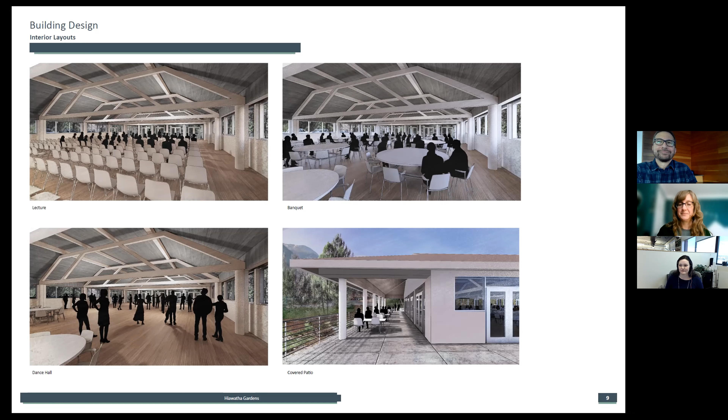To build off of that, in terms of the site, some of the big picture goals are to provide opportunities for parking, and from there those exiting their vehicles have access to the bus stop and shelter on the west side of the site. If you aren't arriving by vehicle, you may be coming via the bus, or we're also providing options for bikes and bike lockers. In terms of that multimodal community and parking lot, we're also looking at electric vehicle charging stations and planning for the future uses of this site.

Each of these alternatives takes that into mind, really looking at and capitalizing on the pedestrian and bicycle connections, as well as vehicular circulation throughout. A concurrent project which ties into our site is the potential future creek trail connection, which will provide access to pedestrians and bicyclists to this Hiawatha Gardens site.

On this first alternative, you see that a pedestrian may enter the site from the plaza area. If they're coming from the creek and have access to the building, they could exit via the bus stop shelter using an accessible ramp or stairs to also access this large plaza area. And if arriving by vehicle, the main vehicular entry is located on the north side of the site, adjacent to and across from Pinon Lane.

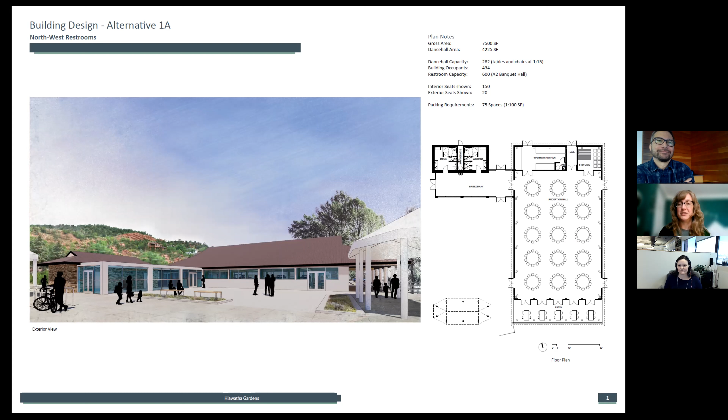But right now we're thinking about the building configurations. So you can go to the next slide. This option allows for a pass-through on the patio to the south, the covered patio under the existing roof, with that connection from both sides of the site, while having the restrooms connected on the south side and leaving that plaza space further to the north.

For alternative 2, you'll see that the entry into the parking lot is in the current location to the northeast of the site. Another future study to be determined by the city is the possibility of implementing and keeping the northwest entry into this site.

And you'll see on this alternative that the big, large plaza area is maintained in this location. As Jennifer was mentioning, another opportunity in this plaza space could be public art, tying that into the rest of Manitou Springs. Looking at the landscape, we'd want to incorporate the City of Manitou Springs landscape planting guidelines throughout this site and make sure we're water-wise in those choices as well.

So it's very similar in terms of the plaza orientation and location, just a little bit larger in this alternative. It still incorporates bicycle racks, bike lockers, and electric vehicle charging stations on the north side of the site.

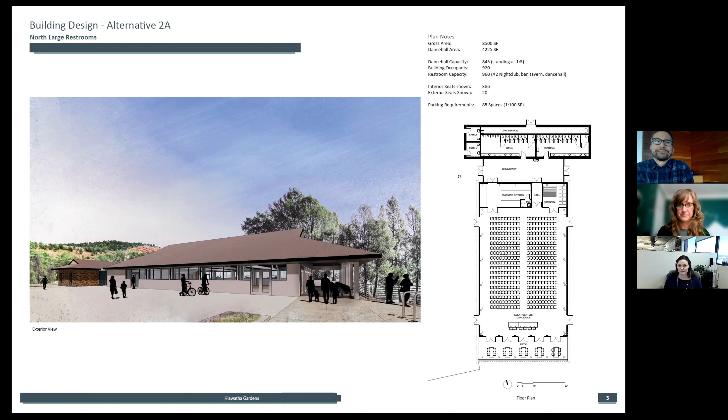This building option is a little bit smaller, so it could hold fewer people. This dance hall capacity is 489 right now, assuming that the back half is usually filled with tables if you were having some kind of reception, and the south half could be left for dancing.

But the restrooms in this option are basically the same width, that building component is the same width as the existing dance hall, so that relationship is a little bit different. And that again changes the experience of that plaza. There's a little bit more room to get around the north half of this building if you're looking back at the site. So that's a differentiator for this plan.

Alternative 3 looks at the entry connection mid-block off of Old Man's Trail as you come into the site, and provides walkways around the entire Hiawatha Gardens main building with that covered breezeway, providing also that connection to the creek. Each of these options tries to capitalize on the natural aesthetic of this site as well.

And then as you proceed through the parking lot, there's a secondary entry/exit off of El Paso Boulevard in its current location. Again, this alternative incorporates the bike racks and bike lockers and is mindful of that future trail connection for pedestrians and bicyclists.

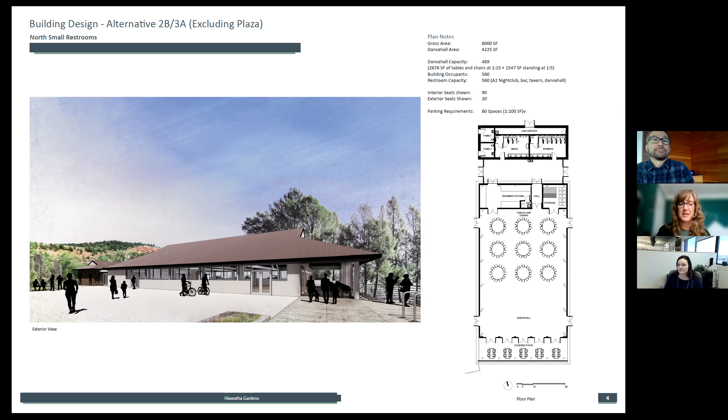This is actually the same plan we just looked at on the site. As you saw, there was more of a continuous plaza all the way around. So that was in a smaller plaza option. Go to the next slide.

And this option is kind of our medium-sized north restroom. So this building configuration is sized to still have a number of folks in the dance hall. That number is 679 in this scheme, but we've also incorporated the parking department offices in this scheme.

That was something that we heard from the task force might be an incentive to have folks in an office who would be providing some supervision to this building, 24/7 or at least during the workday, so that they can keep an eye on this facility, and that might be a need for Manitou city offices, to have these folks in a different location. So that's what you're seeing in this plan, and then the restroom capacity to fit both of those uses. Also knowing that the previous plans might be a few too many people to manage, but that this might be a good happy medium as far as occupancy.

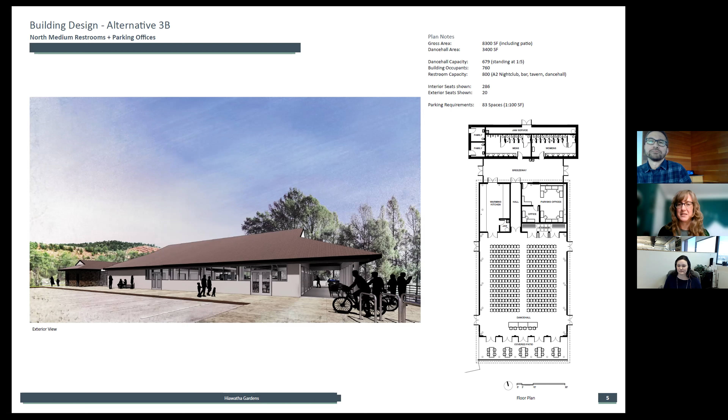For alternative 4, you'll see again in this alternative a mid-block entry for vehicular circulation with, again, the entry exit off of El Paso Boulevard.

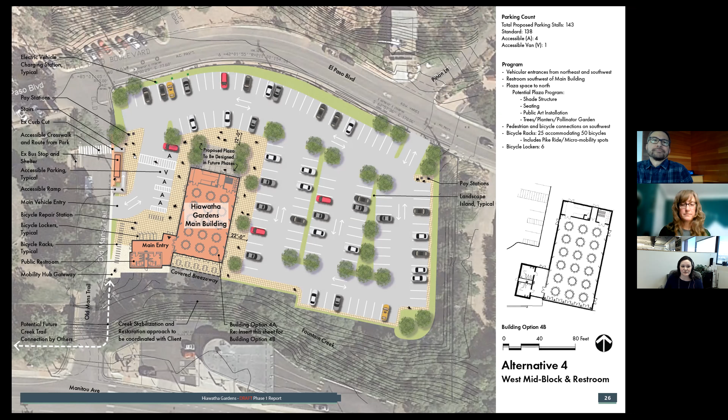Because of the location of where the restrooms are sited in this alternative, there is an opportunity for a larger plaza space on the north side of the building here. And again, providing pedestrian and bicyclist circulation around the building, and that accessible walk across into the bus shelter.

And in 3D, this is what you begin to see again with the location of that restroom sited on the southwest of the building, accessible parking and an accessible crosswalk to the bus shelter, and then that larger plaza area on the north side of the building here.

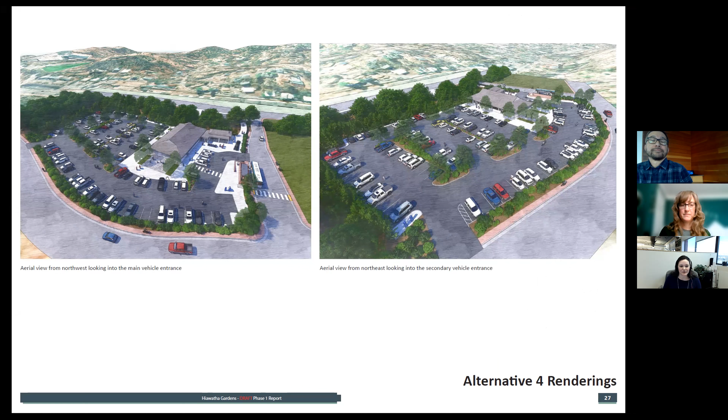This configuration pulls the restroom addition back, allowing for additional plaza space and kind of utilizing what we have on the south, so that isn't an underused area. It still allows for pass through the patio and through that breezeway to the plaza. And that glass front kind of shows that connection between the two buildings.

There's one more. Oh, maybe not.

On this scheme 4B, this is a little bit more of a regular configuration as far as it's all lined up: the reception hall, breezeway, restrooms. So it makes for a little bit simpler construction.

And on this site, this version is the one that we have prepared where we actually don't have that patio to the south, so we have an extra bay of tables on the inside. And there are a few more feet of overhang where the current foundations are in the creek. So we do have that outdoor connection still established, but we don't have the patio in this version.

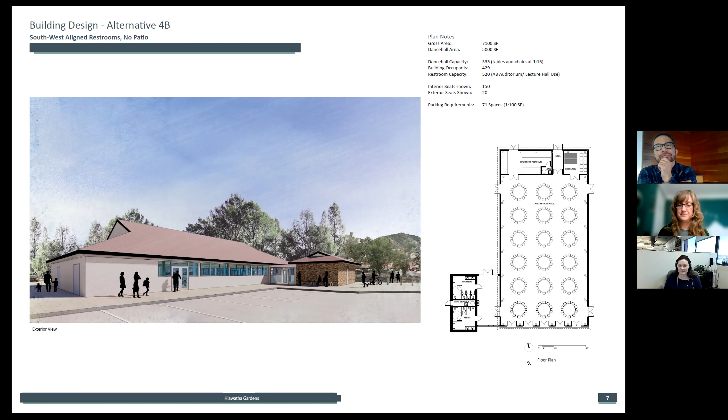That's our last plan. Ed, did you want to close us out?

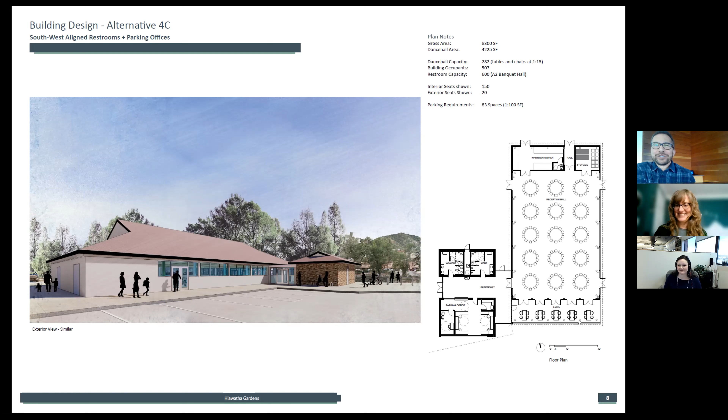Well, I just want to reiterate briefly that this has been an exciting process for us to be a part of, and also reiterate the fact that the task force in the city of Manitou Springs has done a really, in our opinion, marvelous job in exploring a variety of options.

And we've tried to coalesce those options into 4 distinct alternatives, each with various advantages.

We're really excited to share these alternatives with the community, as the task force in the city of Manitou Springs has been really careful to drive home during this process that the overarching goal here is that this become truly a community asset for Greater Manitou Springs. And so that notion of flexibility, that notion of it being another center for community activity within Manitou Springs has really been one of the key drivers in developing these 4 alternatives.

We're excited to hear back from the community members on their impressions of these alternatives, and we're eager to learn and listen from that feedback and allow it to inform the next step of development and design. So yeah, thank you. Thank you.